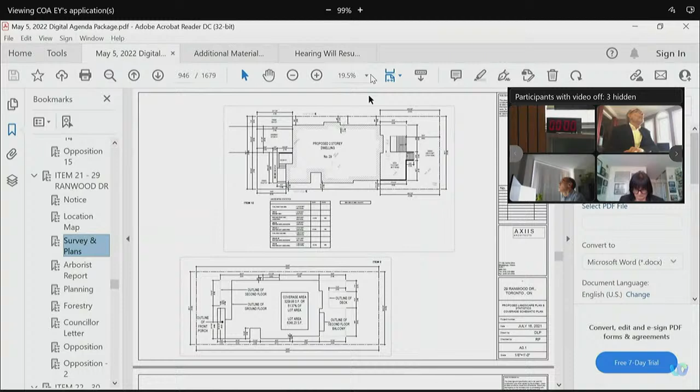Sorry, I can't follow that. So I think I'll ask the question just one more time. What I'm asking is, do you have a variable percentage or number that would tell me that if that storage unit was not included in the calculations, what the numbers would be? I have it right now, not in writing before you for the actual percentage. So you don't have it for your presentation. Okay, thank you.

Yeah, I see. That is something that's usually explained in the staff report. They'll say, well, I know he's at 51%, but if you take off that, it's really all underground, it's really 41%. But that was never... I don't want to repeat what I said earlier. I understand, that wasn't clear to me, to go back and explain that to community planning and for them to say, yeah, he's right, it's not as bad. I sort of look at it by looking at your plans next to the next door house, and hope it's not, and you are a corner lot. That's I think what Mr. Bellissimo and I were trying to get at. I do understand that, and I just was trying to point out that it is there. They asked for it, and this is how we provided it. It was deemed acceptable by them, so I apologize for that.

So let's hear from the neighbor at 31 Ranwood, Ms. Kolanka. Yes, speaking.

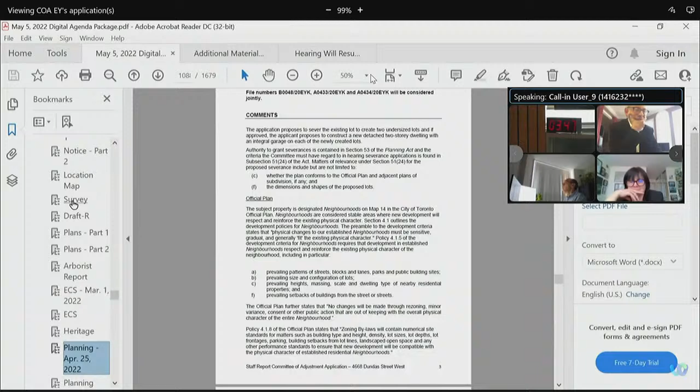So we don't have any unusual variances here, and as a matter of fact, in a consent application, it's typical for there to be 13 variances. That's the usual number, and it starts with lot frontage, lot area, and goes from there. But I don't believe that planning is actually very in touch with what's going on in this application, and I think they've missed it.

Okay, I can see the clock. Can you arrange so I can see the clock, or someone, since I'm blind? Is Mr. Flynn at his 5-minute mark yet? Mr. Chairman, 4 minutes. He has another minute.

If you could tell me what the neighborhood objections are, I would try to address them too. Okay, Mr. Flynn, I told you I just saw something in construction. Where's the elephant in the room?

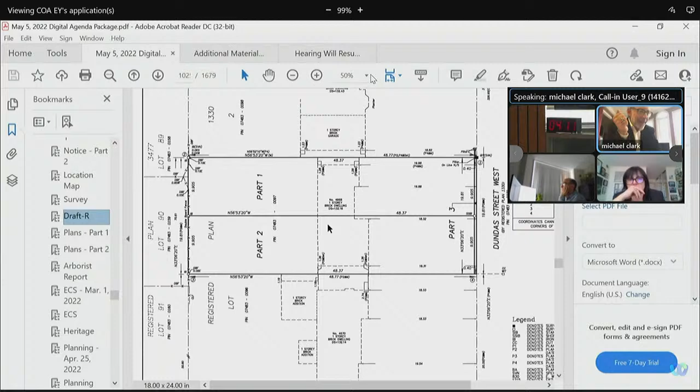You're talking - it says very clearly in the report. They're saying your lot frontage is inappropriate. What are you saying, they're talking about variances? They have a problem, in the last 2 paragraphs of their letter, right at the end. That's where I always scroll to. Planning staff - you're talking planning, okay.

Not approval. Well, hold on a second. The proposed severance and resulting lots would allow for 2 undersized lots that do not respect the physical character, et cetera - they specifically say they are much narrower than the prevailing character of the surrounding area. It goes on. What do you read this? What do they say about that?

April 25th, but it's very clear what they're objecting to. They say the lot frontages are inappropriate, sir. Read it. I know what they're saying. I disagree with them. Okay, but you're glossing over it. You're glossing over it. Prove to us.

You just said something about something up in the Application Information Centre about a lot study. I don't see a lot study. Do you see a lot study? Did you submit something within it? I think it's called supporting material. I don't see that - there's 3 of them, and it's there.

Well, it starts with 4617 Dundas Street West, 4619 Dundas, 4655 Dundas, 4667 Dundas, 4655 Dundas, 4667, 67B, 67A, 4672, 4673, 4674 - that goes on a couple of times - 4676, 4678. What are you reading from, Mr. Flynn? This is listed as supporting material on the AIC.

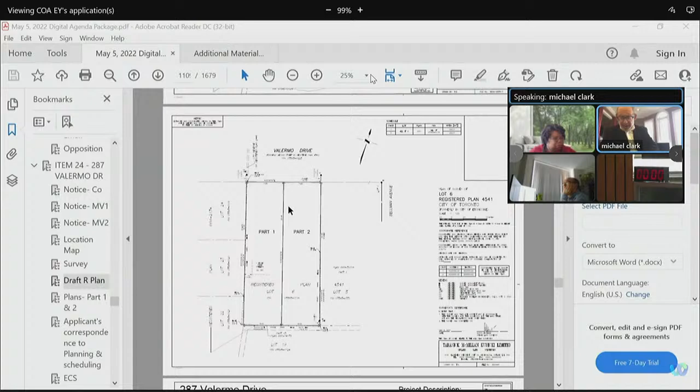Next application is again another consent to sever. Items 24 A, B, and C, 287 Valermo Drive in parts A and B. It's an application to consent to sever the property into substandard lots and to build on each of the sides a pair of semi-detached properties, each having variances to the zoning bylaws.

We have the standard engineering construction services memos and a planning memo back in 2021, not to be scheduled, but other than that I don't believe we have anything. I believe there are 11 variances on each of the sides proposed to be developed as a pair of semis. The applicant is Arlene Beaumont, agent for the applicant, and we have the neighbor from 5 Goa Court present to make submissions.

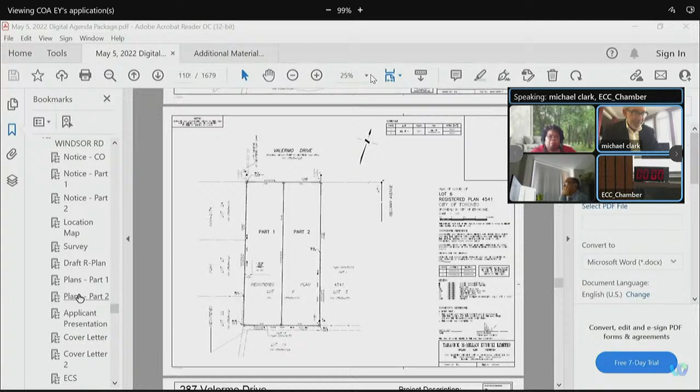Okay, so moving on to item number 25, 24 Windsor Road, application again to sever the property into 2 undersized residential lots and to construct on each side 2 new detached dwellings with attached garages, requiring variances to bylaws as set out in parts B and C. Each requiring, I believe, 8 variances to the bylaw, including the lot area, but not the lot frontage.

Mr. Chair, members, I'd like to bring to your attention that the area resident at 71 St. Andrews and the area resident at 69 St. Andrews are both not present on the call at this time. The area resident at 17 Windsor Road is present at this time. Okay, so we'll hear from him after we've heard from Mr. Sabanu.

Okay, Mr. Sabanu, and we have your presentation materials up on the board, on the screen rather. Go ahead, Alex. Hold on a second, I guess I didn't finish presenting this. I believe community planning has a condition of approval to construct as illustrated in architectural plans regarding front yard setbacks. We have letters of opposition and 11 letters of support. In addition, the engineering and construction services memo, a couple of cover letters, including an applicant's presentation, which a good segue is up on the board.

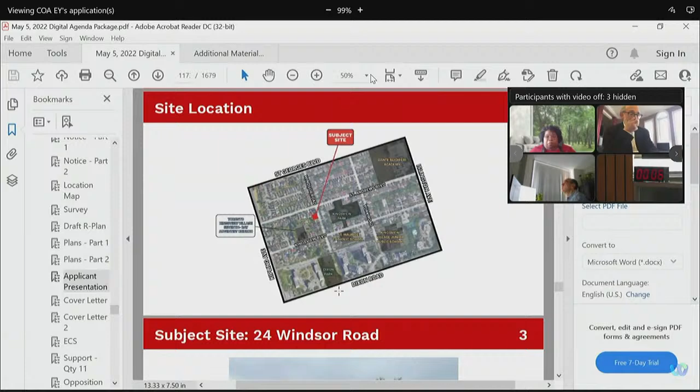The site is located in Kingsview Village, northeast of Kipling-Dixon. If you can go to the next slide, please. What's interesting about this site, Mr. Chair, as you noted, is we do have a variance for lot area, but not one for lot frontage. That's because prior to submitting the application we did a lot study of the surrounding area, and you'll see some of those studies in a moment. Out of all the lot studies, approximately 400 of them, the frontage we have on this site, 27.5 meters, was in the top 1 percentile of frontages in the area. So it is a very, very large site in terms of frontage. If you can go to the next slide, please.

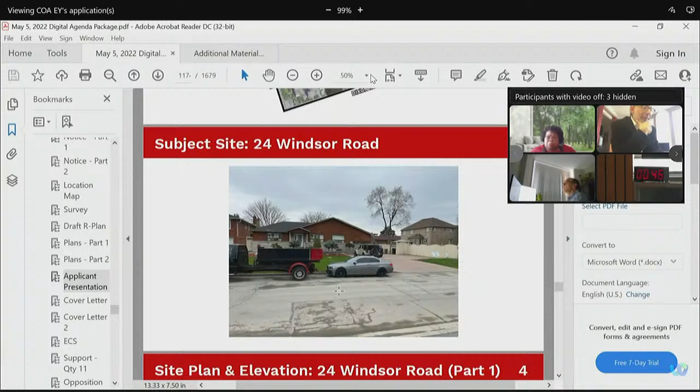So in terms of the proposal in front of you today, we are proposing to sever the lot into 2 and construct a new 2-story detached home on each that would be pretty much identical. One of them is to be used by the father of the existing owner.

Just in terms of the process, prior to submitting the application, we did research and got some lot data information from the City of Toronto, analyzed it to confirm the appropriateness of severing this property. We then approached planning prior to making the application to discuss it with them, and they did agree that this was a lot specifically appropriate to be severed. We then made our application.

We had a number of variances. We met with planning staff, and they noted some relatively minor concerns regarding GFA, coverage and front yard setback. We accommodated those comments and resubmitted the plans, and those are the plans in front of you today. Planning staff now have no objections to this proposal.

We also reached out to our neighbors, went door to door, and you will see on the AIC, we do have 11 letters of support. Next slide, please.

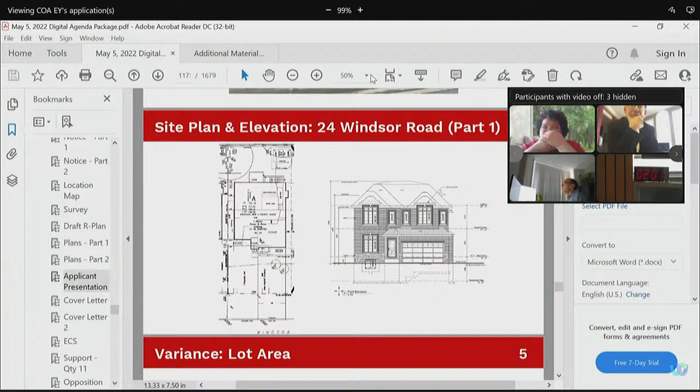So as I mentioned, we do have a variance to lot area. With respect to the severance, each lot will comply with the minimum lot frontage of 13.5 meters, as you can see on the image to the right. So in terms of the frontage, it will be in keeping with the bylaw and also the existing character of the neighborhood.

Regarding the lot size, in our letter we go into a fair amount of detail about the eclectic nature of the lot sizes and configuration, but knowing that I only have 5 minutes, I'll summarize and say, while we are less than the bylaw minimum in terms of lot size, it would be in keeping with lots in the surrounding area.

You can see some of the studies we did in terms of existing lot areas on the image to your left. The size of the lots would be imperceptible from the street. And I think the main thing is that they are large enough to accommodate the proposed buildings, which have been designed specifically taking into consideration the size of these lots. This wasn't a situation where we had a home and we were going to put that home on any lot size. We knew the lot size and we designed the home to respond to the context of those lot sizes in the surrounding area.

Next slide, please. So regarding the front yard setback, the way the bylaw measures setback is it takes the average of your neighbors, but they need to face the same street. So to the north, which is to the left, off page, that home actually faces St. Andrews.

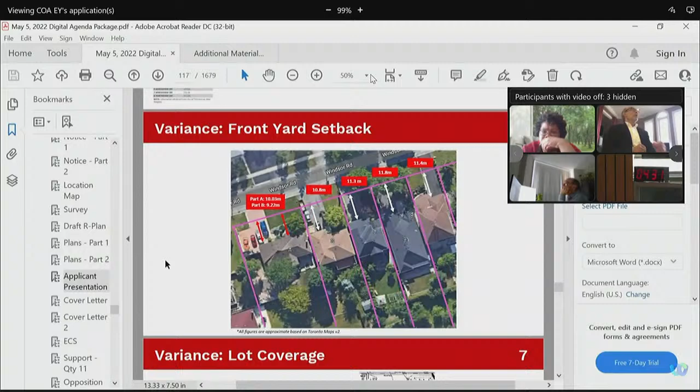Next slide, please. So regarding coverage, a very minor 1% increase over the bylaw maximum of 33%.

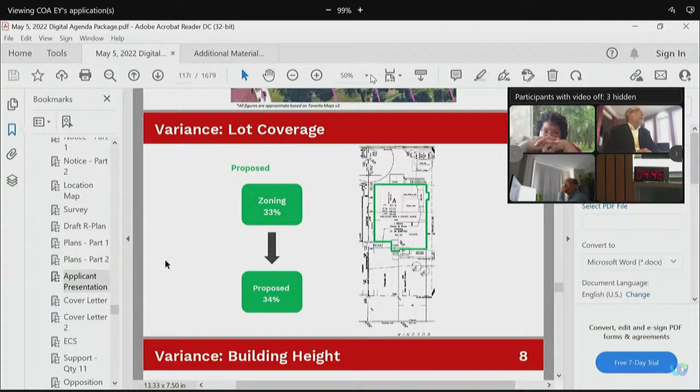We also reduced this from 35% as requested by planning staff throughout the review of the application. Next slide. Regarding height, again very minor, a 26 centimeter increase over the bylaw maximum of 9.5 meters.

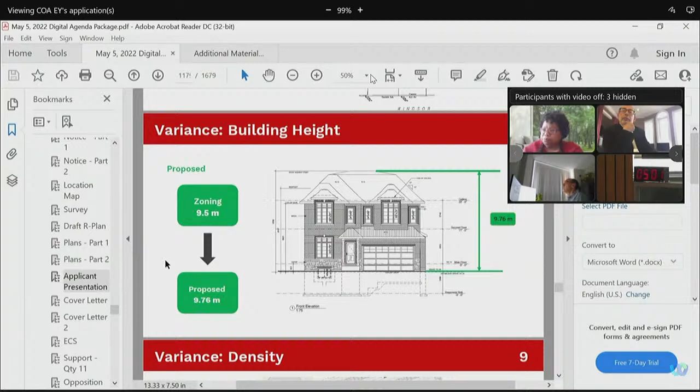And in our opinion it doesn't cause any undue impacts to our neighbors. Next slide, I know I'm going close to the 5 minutes here. In terms of density, very quickly, we had reduced the density from 0.61 to 0.59, again requested by planning staff. This density variance does not cause numerous envelope variances like side and rear yard, building depth, landscaping, and as I said, a very minor 1% increase in lot coverage.

So the next slide, I'll close up by just saying - Chairman, we're at 5.5 minutes. Okay, just in closing, we reviewed the staff reports. We have no issues with the conditions. We did our research before and during the process. We reached out to our neighbors to elicit support and share the plans, and I'm happy to answer any questions you or the neighbors may have. Thank you very much. Thank you, sir.

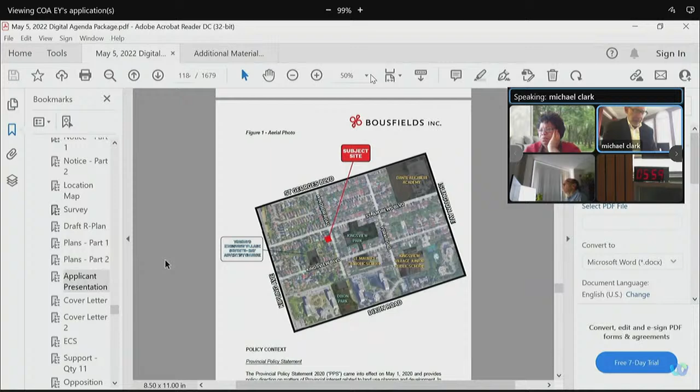Okay, so anyone have any questions for Mr. Semenu? If not, we'll hear from the one neighbor we have present to speak.

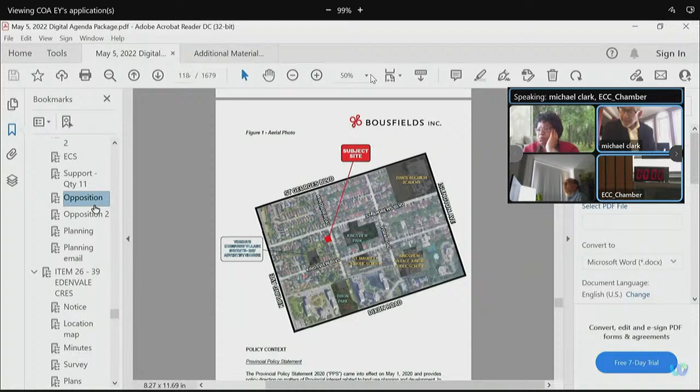17 Windsor, Richard Ross. Hi, can you hear me? Loud and clear. Yeah, so I'm Richard Ross and I live at 17 Windsor Road. I was looking at the plans. I'm sorry, I'm at work right now, looking at my telephone, so I'm kind of cross-eyed looking at all your words on your papers there. But my concern was the variances that were put in place, particularly the setback of the house.

And I think that's been addressed now. I understand obviously the reasons to maximize the amount of home you can get on lands as expensive as they are. That house was not bought too long ago, for about $1 million at the time. So I do understand that severing the property is a good idea in the sense that lot is certainly one of those lots large enough to be severed, in keeping with the styles of the homes and the neighborhood. We all have larger land sizes because it's veterans land from way back when, so we'd like to keep them as large as we can, but we understand the need to get into higher densities, especially with the impact and problems of the housing situation in Toronto.

The other thing I had a concern about, and it seems minor, but there seems to be an awfully large driveway for each one of these residences proposed. Today we have like 6 cars on that lot, and the next door neighbor also has about 5-6 cars on their property. It's getting very packed, and obviously there are more people living in the home of driving age, and perhaps more families. I don't know, but it's causing quite a bit of congestion of cars in the area, and I noticed the driveways being accommodated that way. In fact, that driveway on that house was redone, and I don't know if it was ever allowed to be widened to such an extent that you could put 8 cars in it. I'm afraid the same behavior will take place even if these 2 lots are severed with these larger driveways. I'm concerned because that is not in keeping with our normal driveway sizes on this block, if you care to measure.

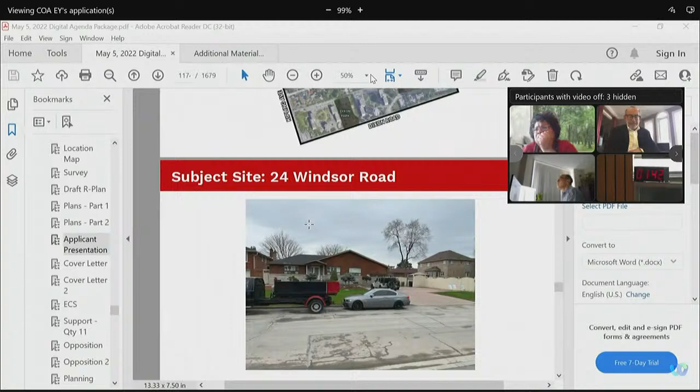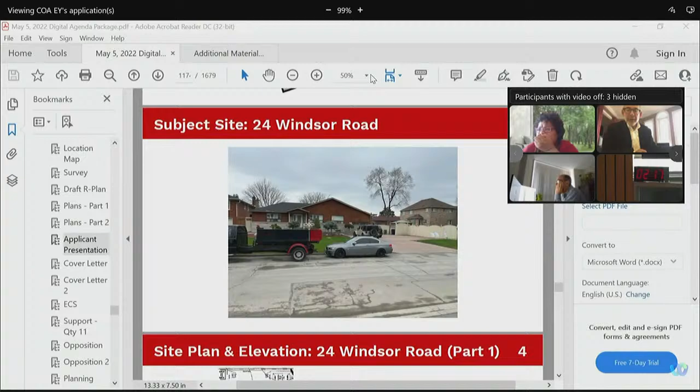Thank you. Okay, any questions, follow-up questions, or is someone ready for a motion? Danny Bellissimo is ready for a motion if there's no further questions.

First, I want to thank the presenter. Such a great presentation. It makes our job so much easier when you see aerial photos showing the houses next to it, and a zoning lot coverage drawing which showed just a 1% increase. So I applaud him for his extra work and making our job easier and easy to comprehend. So I'd like to move for approval of the consent.

Okay, well we'll do it all together, I guess, the variances, yes, all together. Okay, the consent and the two variance applications. And I saw Ms. Ruddick put her hand up. Second that motion, all in favor? Unanimous approval? Wait, we have conditions.

Are you imposing any conditions? There's urban forestry conditions, thanks Barb for reminding me of that. Engineering and construction, and planning conditions too. Yes, the planning condition with respect to construction as illustrated, and also the construction and engineering services standard conditions of approval for consents, and within the whole consent approval the time limits and all of that. So all the standard conditions. Thank you also, Barb. And also transportation conditions, which I think is under the same umbrella. Yes, thank you, I got too excited about the presentation, I forgot about the conditions.

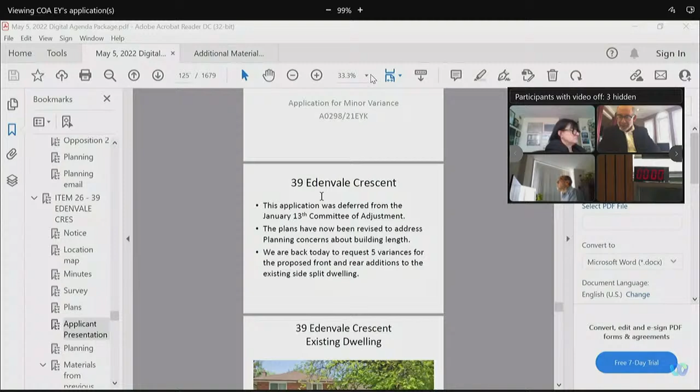There are 5 variances. We have an applicant's presentation. This matter was actually deferred from the January 13, 2022 hearing. We have a planning condition of approval to be constructed as illustrated on the architectural plans regarding the proposed building length and the height of the flat roof, and we have all the materials from the previous hearing back in January. Arlene Beaumont is the only speaker, is the agent. She's actually also the speaker on the matter being held, item 24, A, B, and C, and maybe we'll do that one if we found the other speaker. Good idea, so Mr. Chair, first of all on item number 26, Arlene Beaumont.

Thank you very much, Mr. Chair. So as you mentioned, this item was deferred from the January 13th meeting at the request of planning because we wanted some time to adjust the building length. Planning was not prepared to support anything in excess of 19 meters. We are now down to that 19 meters. So our variance has been reduced a little bit, and all the rest of the variances are exactly the same as what you saw in January. So if you could just go to the next slide, please.

I think I covered that. So, next slide - this is the existing dwelling as it is today.

I wanted to point out there is a concrete deck or balcony above the garage. It doesn't have a railing right now, so I don't think the homeowners are actually using it as a balcony. But the front of the building is being extended - the front of the second floor is being extended to the edge of that concrete deck, so it will match up with the garage. So the front addition is just coming out to the edge of that concrete.

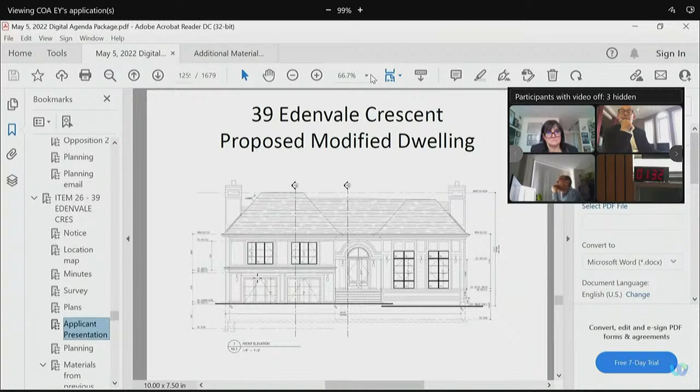And the site plan - the greyed-in areas show the extent of the front and rear additions.

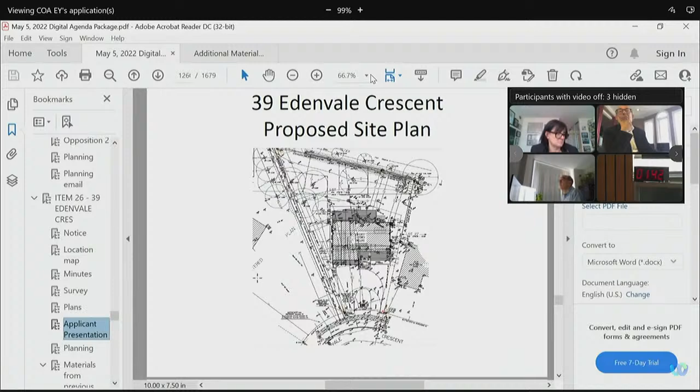So as I mentioned, the existing front yard setback to the garage is 15.29 meters, and the proposed front yard setback is 15.29 meters, because we're bringing that second floor out to match up with the front of the garage. It will still be located behind the adjacent dwelling at 37.

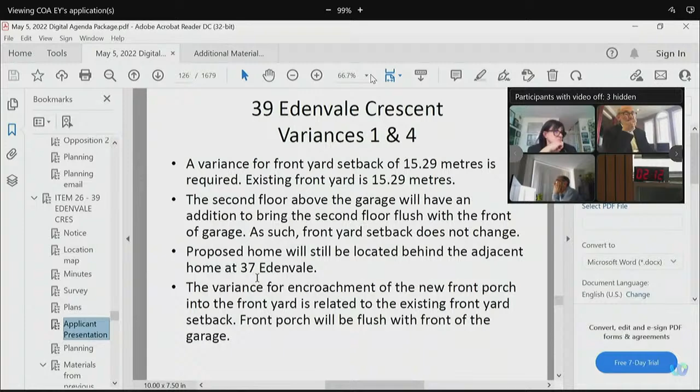And there's a variance for encroachment of the new front porch - again, that's related to the existing front yard setback. The front porch will be flush with the front of the garage. Next slide, please.

So as I mentioned, the length of the building has been reduced to 19 meters. There's also a variance required for the length of one of the parking spaces interior to the garage, because the homeowners are adding an elevator. The elevator is going to take up some space, thereby reducing the length of that one parking space. I've illustrated that on the next slide.

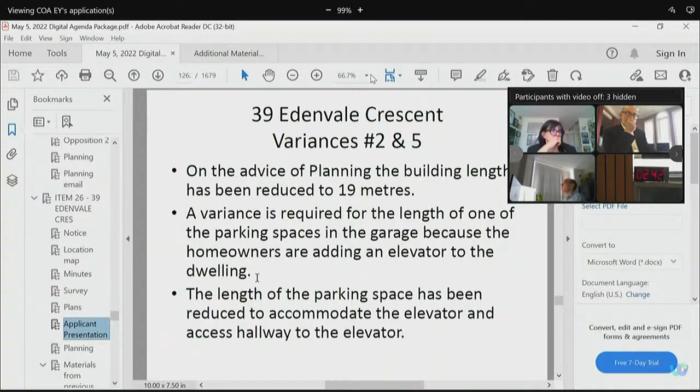We also require, the final variance is for dwelling height. That is required only under the old Etobicoke zoning code, because under that code, if 33% of the roof has a slope of less than 2 to 12, then it's considered flat. Under the new bylaw, we do comply with the height because there's a different definition of flat roof - so we are considered a sloped roof under the new bylaw, but a flat roof under the old bylaw.

So we need a height variance under the old bylaw. We do meet all the requirements under the new bylaw. And that's basically it.

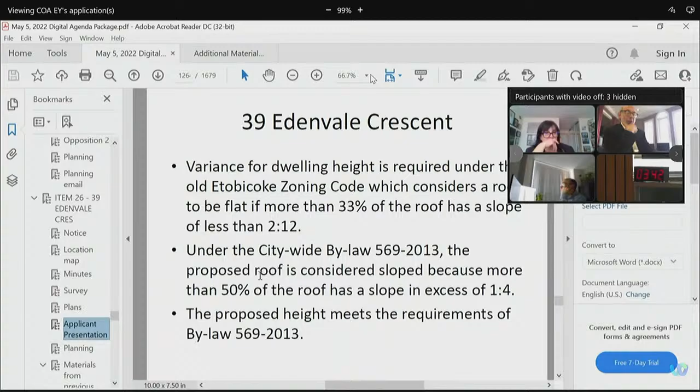I was going to say, and you're okay with the planning condition tying your length and the flat roof height, which is explained in the architectural plans? Yes. Okay, perfect. Any questions for the agent, or someone ready for a motion?

And you're okay with the urban forestry condition 2? Yes. Great. Any further questions or a motion?

There's no questions, I'm ready for a motion. And the variances requested are minor in nature, so I'll move for approval, subject to forestry condition number 2. Thank you, second for that. And sorry, tying it to that planning condition as well, tying it to the plans of March 5th, '22 regarding length and flat roof height.

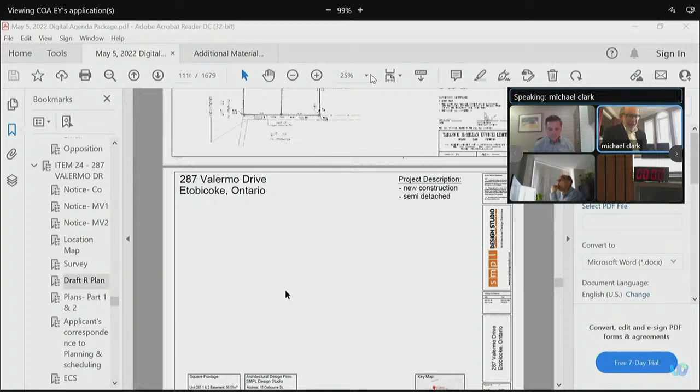Okay, I had a concern about, Ms. Beaumont, when you make your presentation, do we not have anything from planning? Because back on October 6, 2021, we have a one sentence memo saying staff recommend this application not be scheduled in order for the applicant to consult community planning. Well, that was back just before Halloween, so it's been a long time since then. So if you can touch base and let us know if there's been further contact with planning. And otherwise, why don't you give us a short presentation on this consent to sever that I already introduced. I'm not going to do it again, but you can consent to sever the property and build two semis, a pair of semis.

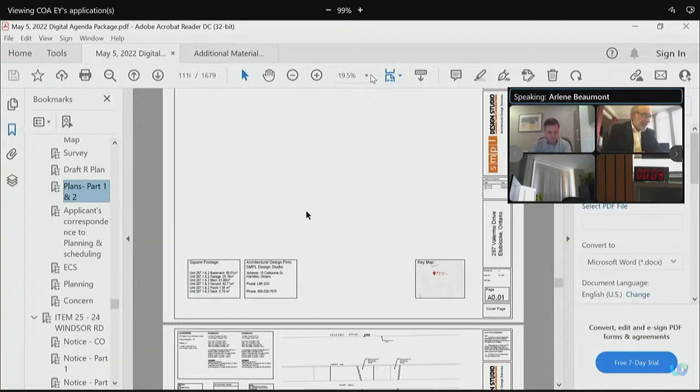Thank you, Mr. Chair. Yes, we have been in contact with planning, and we did actually take their comments into consideration, and we did revise the plans. So we have reduced quite substantially the lot coverage variance as well as the height variance. We have also reduced the gross floor area variance, not as substantially as lot coverage, but we did have a reduction. So I believe that's why planning has not commented. So the plans you were looking at were resubmitted in early March. As you mentioned, we're looking for a severance to build two semi-detached, and we need variances for lot area, frontage, coverage, GFA, side yards, height, setback to a deck, driveway width, and parking space in a front yard.

All the variances, I believe, are very much in line with others that have been approved in the neighborhood. This neighborhood's undergoing quite a lot of rejuvenation right now, a lot of older homes being torn down, severances, new builds, that kind of thing. And from our review of previous applications that have been approved in the neighborhood, our variances are in line, maybe a little bit on the high side, but still in line with what else has been approved in the neighborhood.

Okay, so I'll take it then the variances that appear before us are the ones as revised, right? That is correct, yes. Okay, perfect. Does anyone have any questions for Ms. Beaumont? Or if not, we'll hear from the neighbor in the little court right behind. You can see on where she is on the location map. Okay, so welcome, Agnes Mikalski.

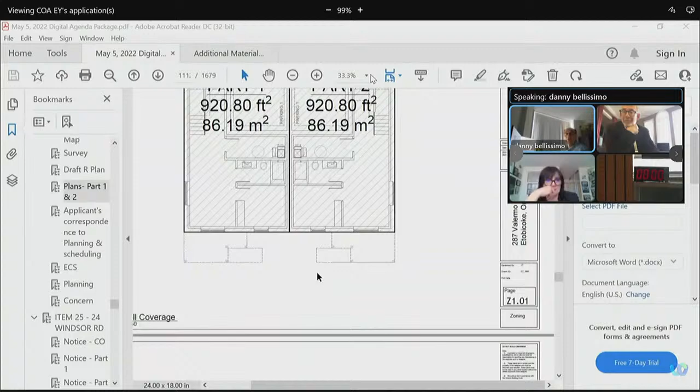Okay, any other questions, or is someone ready for Mr. Bellissimo? Danny Bellissimo has a question. Could the staff put the drawing, elevation A2.02, on the screen? I just have a question of the applicant. It's the elevation A2.02, further down. Okay, that's it, I think.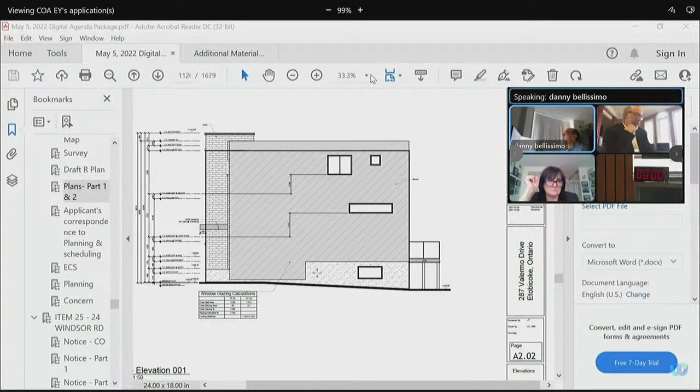So my question is, the heights are based on the frontage of the house, and they include the parapets, correct? Yes, I believe so. And did you know why the parapets have to be so high? Is it a slope roofing condition? They're excessive in my mind, but I'm just wondering why technically those parapets are so high. I'm sorry, I can't answer that question that way. I don't know. Okay, and the ground level at the back slopes down.

It doesn't say how much. Do you know how far that grade goes? See the bottom there? It slopes towards the back, right? Yes, it does slope towards the back. We should have a calculation of grade somewhere. That's fine, I just wanted to clarify this because there's no height numbers on the back, so I'm assuming all your heights are at the front.

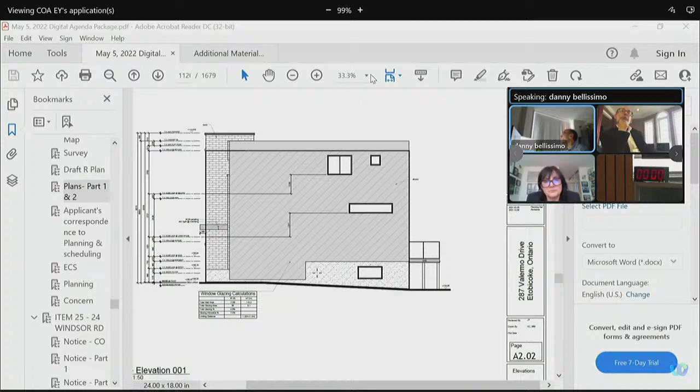And I just wanted to point out, can we go to the drawing before that, A201? That's the one before that. And so those parapets, they're just in the center part, the higher parapet. You actually have two parapets, a center parapet and an end parapet at both of the semis, correct? Is that just an architectural feature? Because that impacts visually on the height, right? Yes, it does. I think it's just an architectural feature. Okay, thank you.

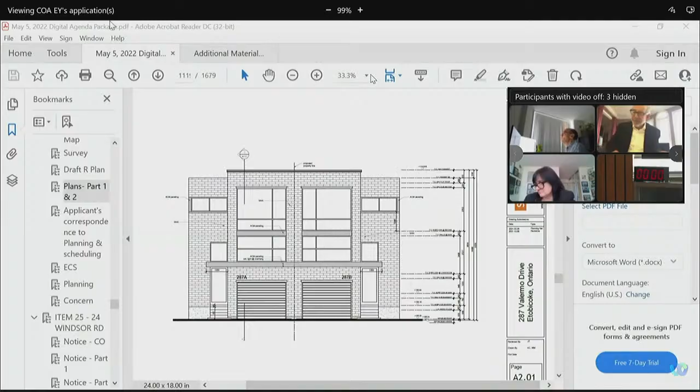Okay, any other questions, or is someone ready to weigh in? Mr. Palmer? Yeah, I'm ready for a motion. I'm concerned about the character, built impact, and massing of this proposed semi-detached two dwellings. So I'm going to move for refusal of the request to sever and of all the variances.

Okay, do I have a seconder for that motion? If none, do I have a new motion? I will second Mr. Palmer's motion based on the height. I'm concerned about the height. Okay, I'll second that motion. I'll second that motion for refusal, yes.

Okay, all in favor of the motion to refuse the application? Hands are up. Okay, it carries 4-1. I will dissent. I believe it's a supportable application. We didn't hear from community planning. So motion carries. The application is refused.

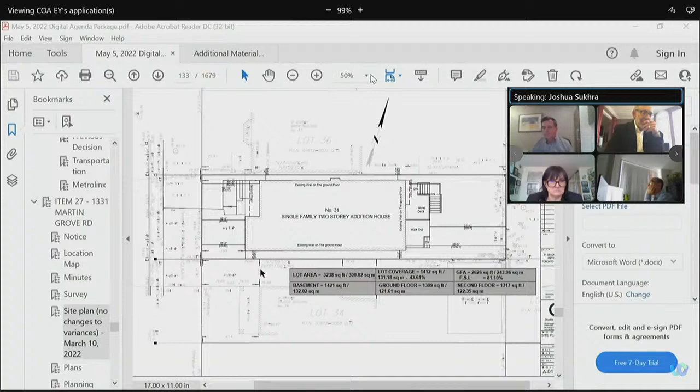Okay, so hi everyone. What happened is that I was going to come in on the 10th of March, and Mr. Timur, when he looked at why we were coming in, said there was no reason for us to come to Committee of Adjustment because we were approved a few years ago already for all of this, and we have a $65,000 security deposit with the city for a few years now.

Unfortunately, we are just a small church and we couldn't afford to finish the whole parking lot or the landscaping. So I asked Sabrina for some time, and Sabrina told me I have all the time. The only thing is, the longer I take, the longer I'll take to get back my security deposit.

And when we were ready to do the project, the pandemic was there and we couldn't do very much. Then finally, recently we asked again to get the project done, but then there was somebody else by the name of Joshua who said he would refuse that approval. He said we have to come back to Committee of Adjustment to get it done, and that is why we came back here.

So Mr. Timur, I think he's with community planning, told me to go in for a deferral because he wanted to make sure that everything is okay, since we didn't need to go back for a new approval. The old one was still good for us because Sabrina told me it wouldn't expire or anything. Then he asked this new person working on our project to let us go with it because it was already approved, but he didn't want to. I begged him, but he didn't want to. He said, 'No, you have to go back.'

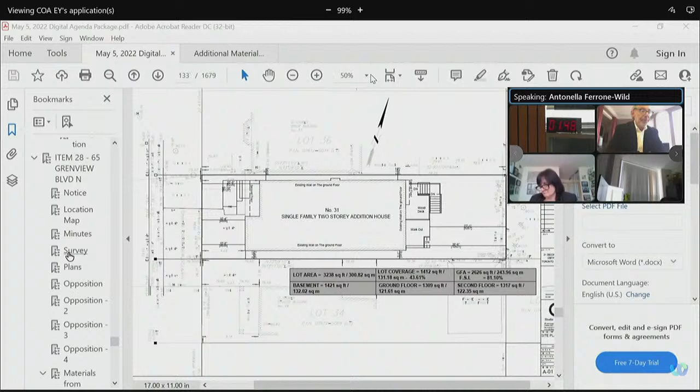I have many examples of similar proposals granted, but the closest is actually 62 Grenview Boulevard across the street. They were granted 150 square meters plus 47.5%. One Kingsway Crescent was granted 150 plus 52%. 52 Strath was granted 150 plus 62%. Not all of them had an FSI. 52 Strath's FSI is 0.86, and at 29 Kings Garden, their FSI was 0.88.

Because we removed the storage below the porch, we removed the variances for length and depth. There was concern about the number of variances, so quite a few were removed. The other variances are for side yard setback of 0.61, and the setback to the rear porch of 0.61.

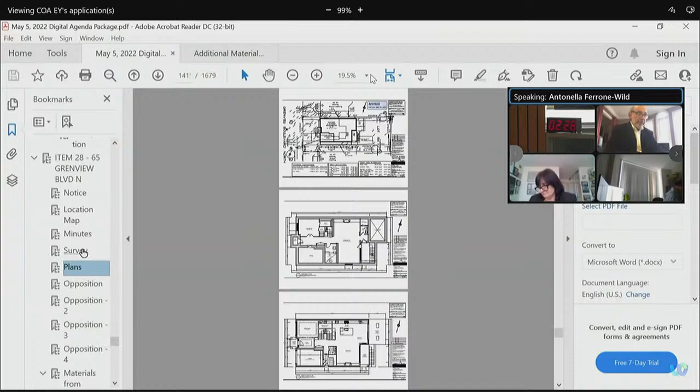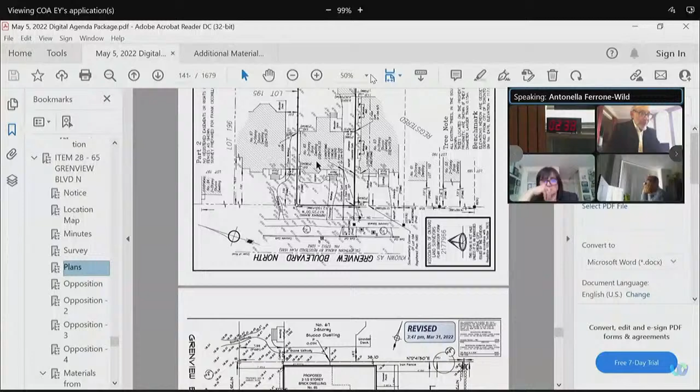You see from the map, the proposed house matches the existing setback to the north. When you look at my site plan and see the dashed line of the home to be demolished, compared to the home that is being proposed, the setback is identical. So that means the impact to the street remains unchanged. But having said that, the setback of 0.61 and even less is very common in the neighborhood.

I found many examples, the closest of which is 23 Grenview at 0.41, 62 Grenview at 0.89, 47 Grenview at 0.6, and I have almost a dozen other examples. Same thing for eaves examples, so I'll skip those for now.

Then there's the height to the flat roof, and the fact that it's a 3-story structure when 2 stories are permitted. So although more than 50% of the roof is flat, and the roof is sloped to the street at both the front and the rear, and presents as a sloped roof, the variance is numerical in nature and appears greater than necessary due to the math.

It is consistent with the prevailing character of the 3rd-story dormers in the area. If you stand on the front lawn of this property, you will see at least 8 examples of 3-story homes, and that doesn't include the existing house on the subject property to be demolished.

I have 21 examples of past approvals in the neighborhood. I won't go through them all, but the closest is 62 Grenview, which was granted 9.87. 66 Grenview was granted 9.8. I have some as high as 10.25, and one here at 11.2.

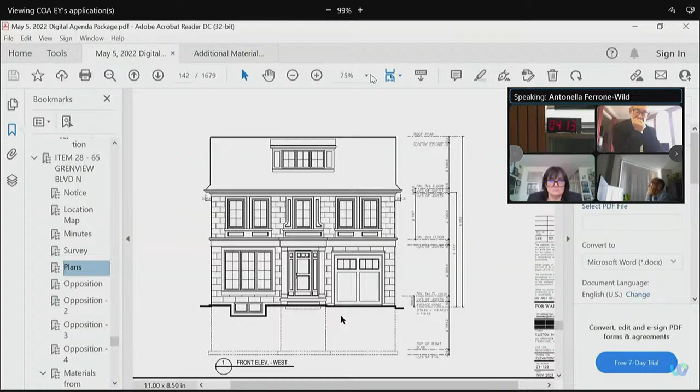The driveway width variance, due to urban forestry's concern for the tree, was also removed. We believe that the variances requested are necessary to construct a home that is in keeping with the trends in the area, and most specifically on the street. They match the massing and style of the street, in the 2.5-story dormer style that you see next door and across the street.

I look forward to hearing the speaker's presentation, and I hope to alleviate their concerns. We did leave a letter in everyone's mailbox and knocked on their doors. We didn't receive any immediate feedback, but hopefully we can do that now.

Okay, thank you, Ms. Wild. So yeah, in the minutes, this matter was deferred to council. I think there were 10 variances; there are now 9. You've gone through the changes that have been made. It was to make new notice to be okay. So does anyone have any questions before we move on to the 2 neighbors?

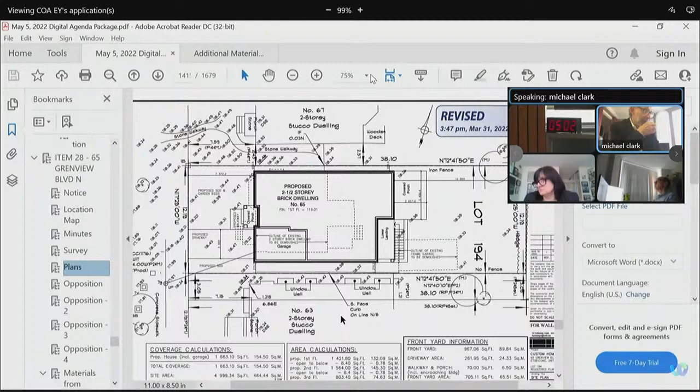We have both adjacent neighbors present, and we have their letters. Perhaps we put their letter up while they speak. So the first neighbor we'll hear from is Cliff Hacking at 67 Grenview.

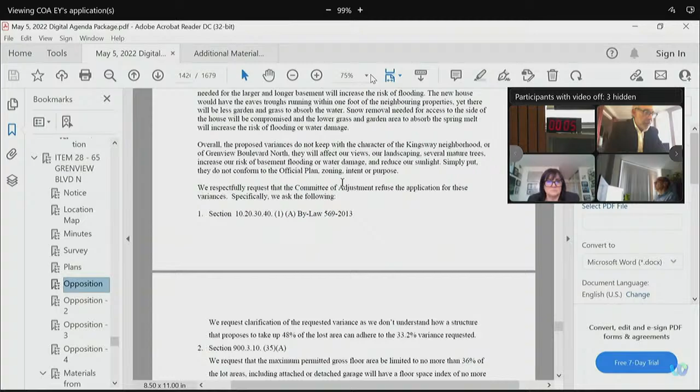Thank you, Mr. Chairman. A couple of things. First of all, the proposal that we received a letter is inaccurate - we received no letter from the builder or from this lady, Ms. Wild. So I just need to clarify that. I'd go on to say that the builder here is not looking to live in the area as many others have done, but rather with a motivation of pure profitability.

And profitability is great, as long as it's not going to negatively impact others. We're not concerned in the least with the increase in height, the 3rd story - we understand that, and we're supportive of it. But we're very concerned about the setback on the side.

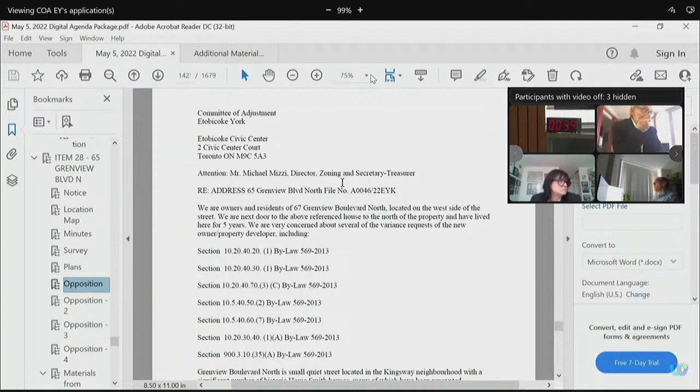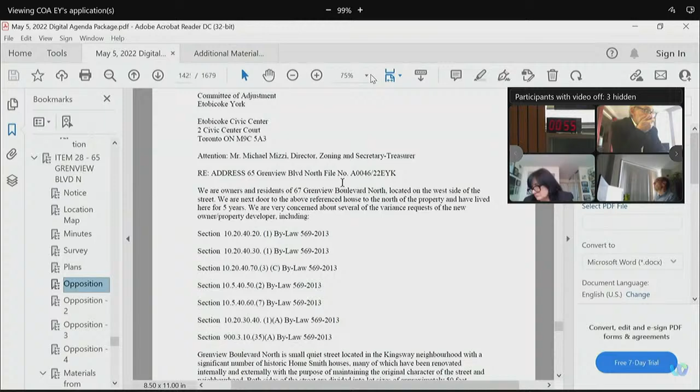I'd go on to say that this house has been vacant for more than 2 years now - we're into our 3rd year of this situation. I had to personally call enforcement to get them to cut the grass last summer, which was almost 2 feet high, and they enforced it. They did not shovel their snow throughout the entire winter, creating a slip hazard for anybody in the neighborhood walking down to the subway, including my family.

There's been a blatant disregard for any of our concerns, and that's the principal one. We're also concerned about the back setback and want to make sure it doesn't go back farther than the current buildings do, so it doesn't block light or planting or other vegetation we have out there.

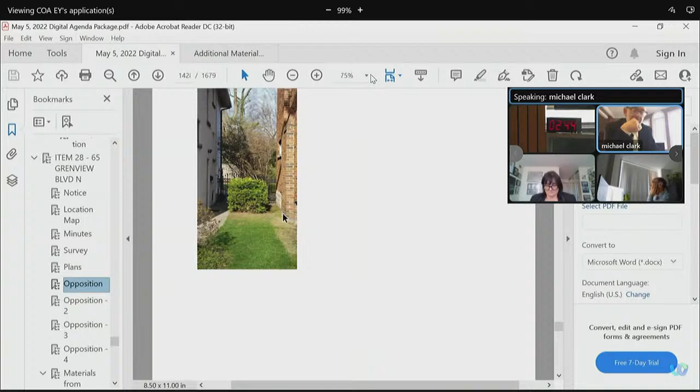I just wanted to back up what Mr. Hacking said, which is that there was no letter left by the owner or his agent throughout this whole process. The only thing I received was a hand-scribbled note on graph paper on the evening of April 28th, which was actually the deadline for us to submit this latest letter of objection. So if there was a door-to-door visit, it would have happened too late for us to have our concerns addressed.

Personally, or issues explained. So this is why we're here, because we never really had an opportunity to have a discussion with anybody related to this property at all. And I'm quite sensitive to the fact that we're at this stage, because as noted, my husband and I just rebuilt our home right next to number 65. So we're very aware of both sides - the need to preserve the integrity and beauty of the Kingsway and not overbuild, while at the same time needing to build certain things that will accommodate, in our particular case, our aging bodies.

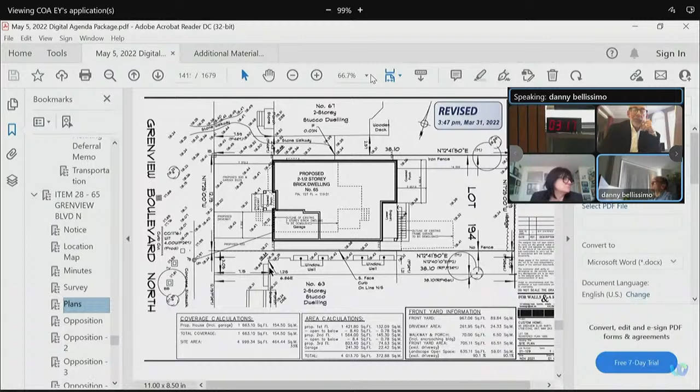Okay, that's fine. I was just asking because I have some issues with the side setback there. I think it's too close given the height of this building, and I think the covered porch is insensitive to put it too close to a neighbor, and that neighbor at 67 may come back to us one day and want a bigger building there with a setback that respects it, irrespective of the fact that they now have a walkway there. I definitely can say my client would be happy to move the covered porch over 2 feet. If I'm texting now, he hasn't answered, but that one I'm quite certain he'd be happy with.

Okay, thank you. I'll let the other members comment as well. Does anyone else have any questions or comments for Ms. Wild, or is someone ready to weigh in? Got three. I'm gonna have to log back in after this application on my phone. So is someone ready for a motion?

Let me try. Danny Bellissimo, since no one else is weighing in on opinion, I would like, if we're allowed, to approve variances 1, 2, 3, 6, and 7, and not approve variance 4 and 5. Those are the two side setbacks at one end of the property.

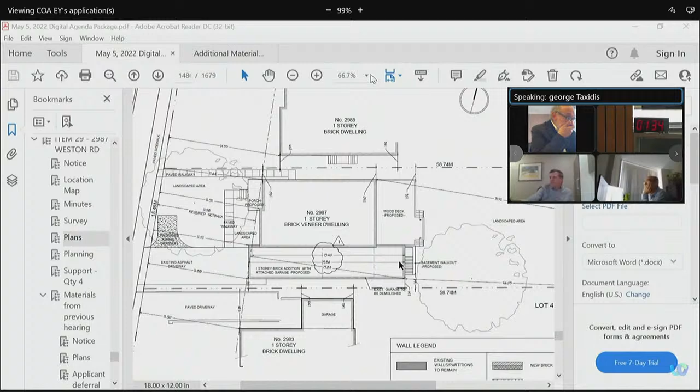For the positioning of the addition, we moved it slightly forward, which affects the front yard setback, going beyond the allowed front yard setback by 0.36 meters. We did stagger it slightly from north to south to minimize the effect of the projection and keep it somewhat in line with the front property line.

As for the side yard setback, the proposed is slightly beyond what is there already, which is the existing garage, to be demolished and rebuilt slightly wider to accommodate a slightly above standard size vehicle and some storage, and again to accommodate some of the living space we are proposing.

These would affect the depth and length of the house, which are beyond what is allowed - the depth being 0.82 beyond the proposed. I believe the allowed length is 17, and we're at 19 point something, sorry I don't have it in front of me. With regards to variance number 5, I believe that refers to the projection beyond the front of the house.

On the south side where the garage is, the garage projects slightly beyond what's allowed, which is the existing house, by 0.42.

For the proposed driveway width, I think that should address the hazardous conditions when leaving and accessing the site because of this busy stretch of roadway. This has also been addressed previously along with residents along that road corridor, and letters of support from Transportation Services Division are included in the supporting documentation in the file.

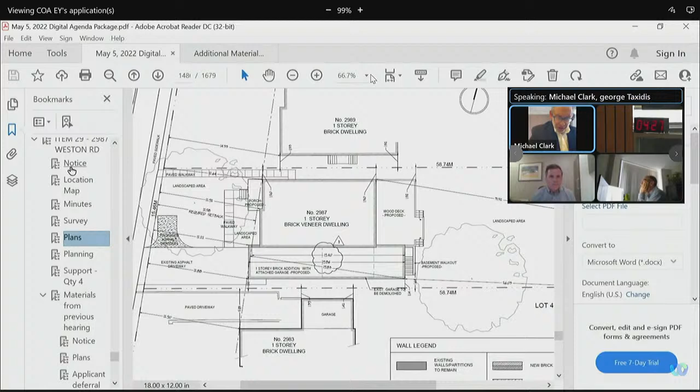Can you hear me? Oh yes, I can hear you. I'm not sure which one you're looking at. No, I'm saying the revised application - there was a revised application. Yes, the application was revised. What was revised on that report was they had omitted - the original zoning examiner had omitted the front yard setback.

So that was, I believe - let me just look and see which item number that was. The front yard setback at 12.58. That was added later after our deferral.

Okay, I just have a note in my notes - correct me if wrong - it just says revised notice, variance 1, revised existing driveway width of 14.6. What am I looking for? Those, Mr. Chair, are previous decisions in the area that the applicant submitted, and he's highlighted certain things on all of them. I see, okay, similar to our revision page.

Apologies - so planning is looking for refusal. We have 4 letters of support, and urban forestry condition 2. Members, any questions for Mr. Taxidis, or is someone ready to weigh in with a motion?

I'm ready for a motion. I disagree entirely with planning department. I think the variances requested are very minor in nature, looking at the site plan. I'll move for approval, subject to transportation conditions and forestry condition number 2.

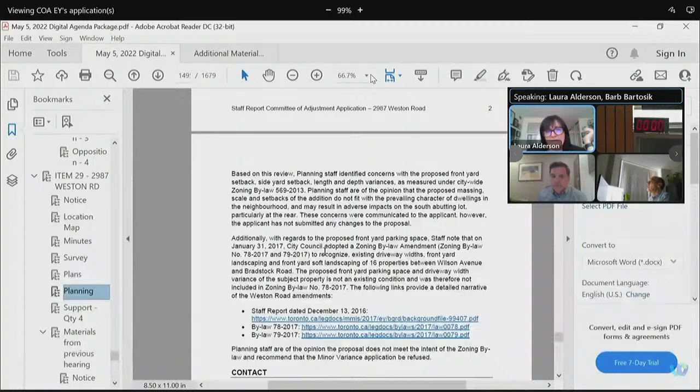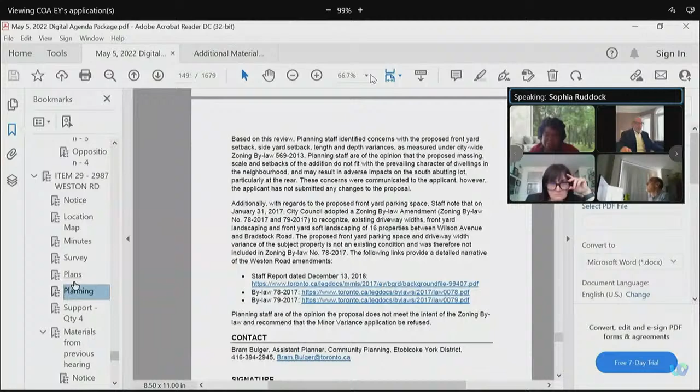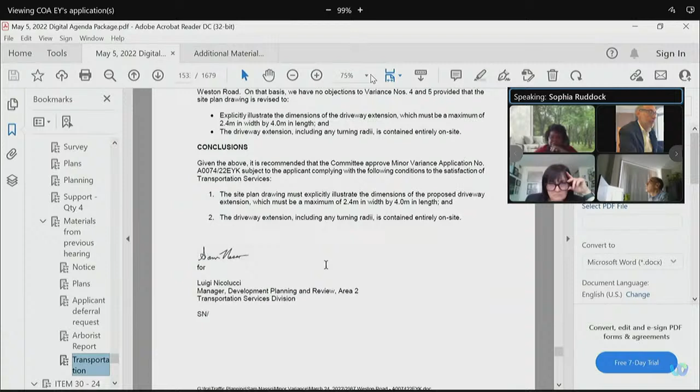Okay, I think maybe I misread it, then it's better to go with the conditions from transportation services. There are 2 conditions from transportation services in their memo pertaining to the driveway, on the last page of their memo. If you could pull that out and put that in. No, they make sense, I didn't read it correctly, sorry.

So we're saying now that we don't have to worry about transportation conditions conflicting with Mr. Palmer's motion? Correct. Okay, can we have that motion again then, seconded, or were we there yet?

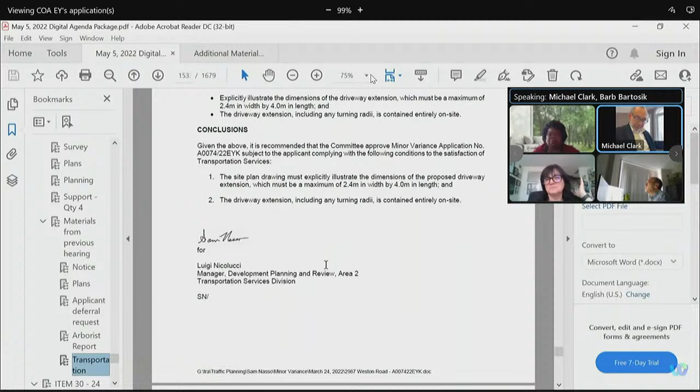Or does someone have a record of where we were 5 minutes ago? There's a motion to approve by Neil Palmer with Forestry Condition 2, Transportation Services Condition. We need a seconder. I'll second that, thank you.

All in favor? I can't see, so please someone tell me. Everyone is in favor. Okay, perfect, unanimous. Thank you, Mr. Taxidis.

Moving on to our last application of the afternoon, 24 Fairfield Avenue. This matter was deferred from the October 14, 2021 hearing. It's an application again to sever a lot into 2 undersized lots and to construct on each side as set out in parts 1 and 2, applications B and C, whichever you wish, to build on each side a new detached dwelling with an attached garage, with variances to the bylaw.

And it looks like we got 7 in each case. Let's see if they're a mirror image of one another. We have planning requesting a condition of approval back from October 6th, tying it to construct as illustrated in the architectural plans regarding length and the front elevation design.

We have 7 variances, including substantial lot frontage of 7.62 whereas 12 is required, and lot area. We have letters of objection, 2 letters from the Long Branch Neighborhood Association. Those are the only ones we have.

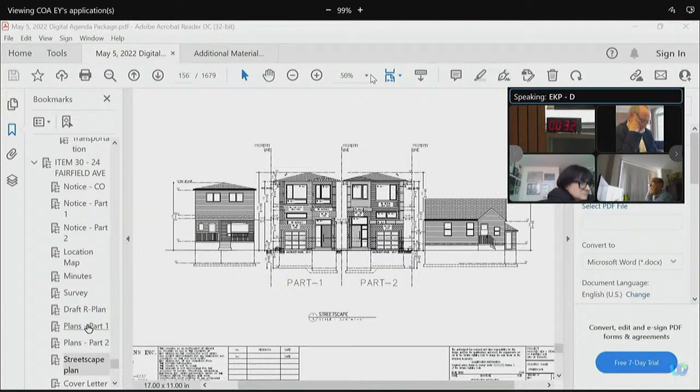We've also sent in a revised site plan, showing that the existing sidewalks and all that is going to be converted into soft landscaping. That was submitted the other day. And we were always ongoing with the planning department.

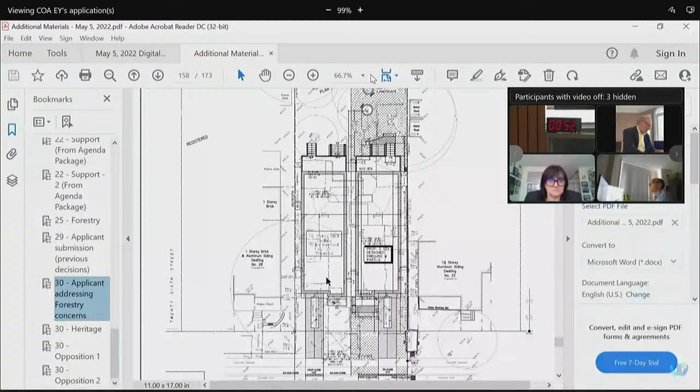First we had a flat roof, higher houses, so we changed the design to a pitched roof. We now only have 8.5 meters to the top of the roof, where 9.5 meters is allowed, so we're 1 meter below the height - it's not a tall house. The only thing we have is the height of the main walls, which we're slightly over - where you're allowed 7, we have 7.5. I feel that the application we're putting before you is very minor in nature, and it meets the 4 tests. I'd like to hear from whatever you have to say.

Thank you very much, Mr. Perez. Any questions for Mr. Perez, panel members? Yeah, what did I see something around, was I dreaming - heritage? Was there something to do with heritage in this application, in the additional materials? I don't have my materials open. Okay, so what kind of heritage condition?

If it's the archaeology ones - oh okay, because I know we're demolishing the house. Okay, you're okay with the condition, Mr. Perez, your client? Yeah, well, we're okay with it, but originally that wasn't there. They just came on this submission, the first I know. But we're okay with it, we'll take care of it. Yeah, we just got it in our package yesterday or last week. Oh, you know, so we didn't see it either. We're okay with it.

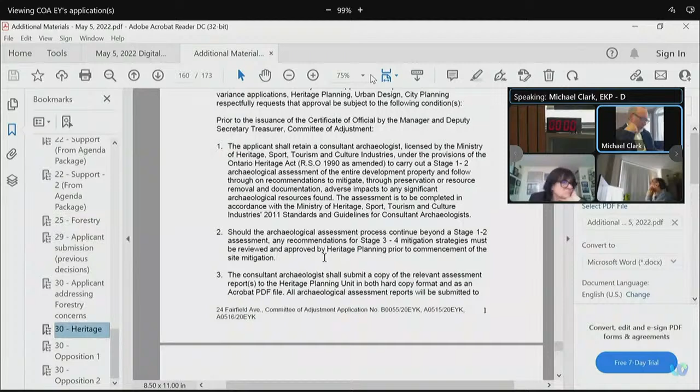Okay, so now we have 2 speakers: Andy Choles from the Long Branch and Stephen Vela also from the Long Branch. Good afternoon, my name's Andy Choles. I'm referring to a letter of objection from Christine Mercado, and the other letter from LBNA. That's the one there.

My name is Andy Choles, I live at 12 Jasmine Avenue, Long Branch. I'm a board member of the Long Branch Neighborhood Association. I'm here to express our concerns about the severance of the lot at 24 Fairfield and the proposed building of 2 homes, one on each of the undersized lots. These planned houses are overbuilds for these tiny lots. It has been a while since I've had to oppose a lot severance with a plan to build 2 soldier houses. I had hoped these things were in the past, but I guess not. With an FSI of 0.64, each of these homes is almost twice the allotted 0.35 FSI for the area.

As is the problem with soldier houses, such a narrow lot, the only direction to build is up. It's a little disappointing to read the planning report, which seems to imply that this type of house is fairly common in the area. I'd like to put forth that this proposal does not comply with the official plan section 4.1.5 and is not common in the area.

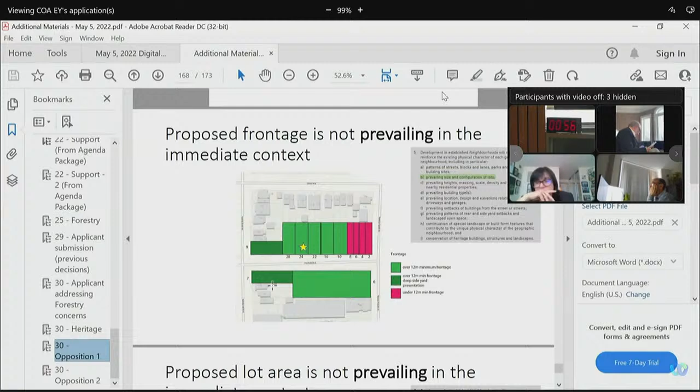Referring to the LBNA letter of objection on page 2, this map shows that the proposed lot frontage for 24 Fairfield is not prevalent on the street. The green areas represent the lots that have frontage of 12 meters or more. That is all the lots on this block of Fairfield, save some at the end of the street, 4 at the end of the street. I imagine these were 12-meter lots that were severed at an earlier date.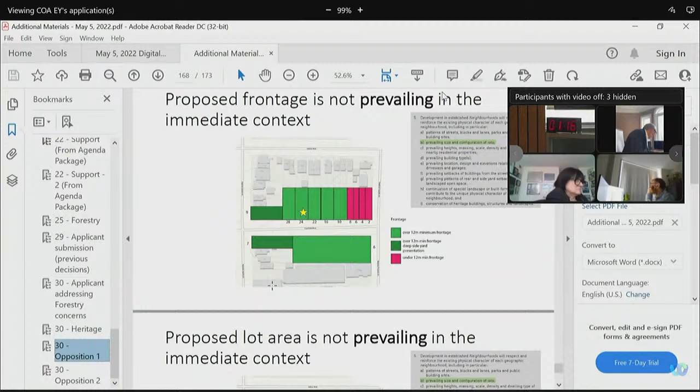Likewise, on page 3, shows an area or size of the lot is not prevalent on this block. Those same 4 pink lots on the end are the only lots less than the bylaw minimum of 370 meters squared. The majority of the lots are generous size with smaller houses and ample landscaping adding to the beauty of the neighborhood. The proposed home will be crowded onto the lot with limited space for soft scaping.

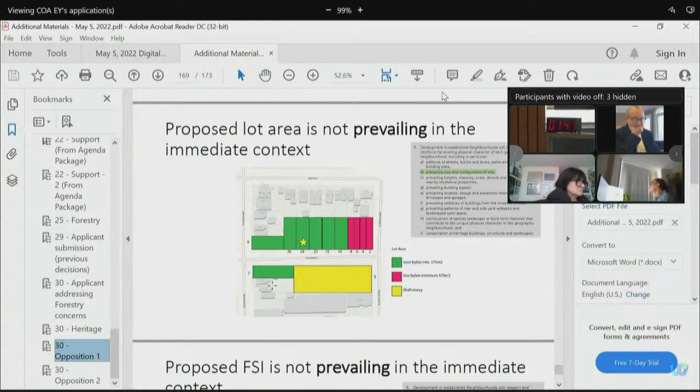The map on page 4 reveals the FSI is not common, even of the two smaller lots, the corner of 24th and Fairfield measure a compliant 0.35 FSI or less. Should the build on 24 be approved, it will double the overbuilds on this block.

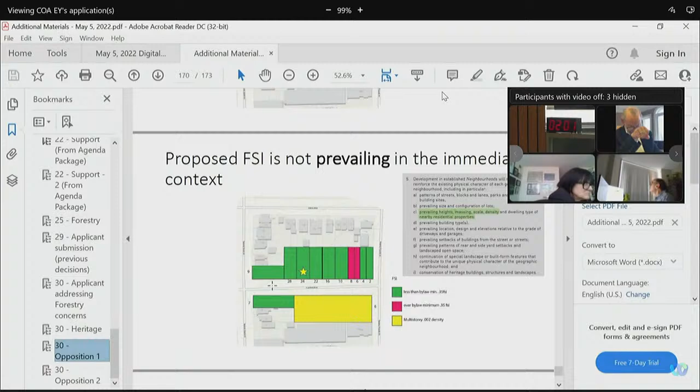Looking on page 5, shows the FSI of the homes one block west on Fairfield between 26th and Phlox. There seems to be more homes above the 0.3 FSI, 0.35 FSI, but they still remain in the minority.

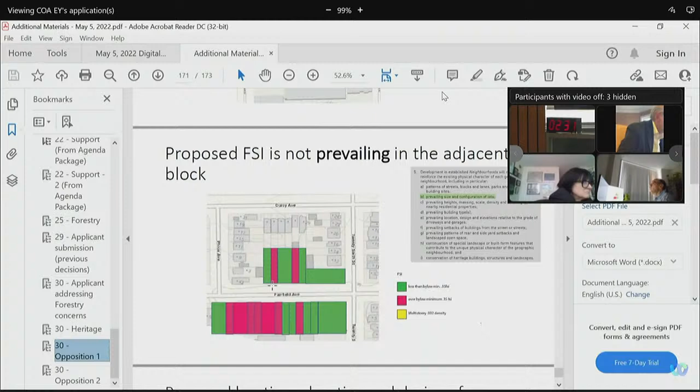The inclusion of an integrated garage in many soldier homes often creates a home that is unnecessarily tall and looms over the road and nearby neighbors. The map on page 6 shows the inclusion of an integrated garage is not common in the immediate context on the block, and page 7 shows they are not prevalent on the next block to the west. There are more homes with parking pads in the adjacent block than integrated garages.

The LBNA always prefers that the parking solution is maintained when a home is renovated or rebuilt entirely. Eliminating the integrated garage will go quite a ways to reducing the massing of the building and make it less imposing. The official plan states that no changes will be made through rezoning, minor variance, consent, or other public action that will be out of keeping with the physical character of the neighborhood.

Clearly, these homes are not keeping with the physical character of the neighborhood. I believe the 4 tests refer to the immediate context of the same block and the block adjoining. These houses will be crowded onto the property. Despite some redesign to make the houses shorter, there still remains 7 variances outstanding: too tall, too close together, eaves too close to the lot line, etc.

I've seen all too often when these soldier houses are going under construction, a huge hole is dug pretty much the width of both lots. It is dug big enough for the foundations of both homes. With a hole this size, it is unavoidable to dig up tree roots and threaten the green space.

Previous construction done at a neighbor at 22 Fairfield has impacted a tree on at 24. I'll leave the tree arguments to my colleague. I even spotted a report in the file from Archaeology, Heritage, and Planning. Now, that was a first for me, but it might be that huge honking hole that has to be dug with a shovel.

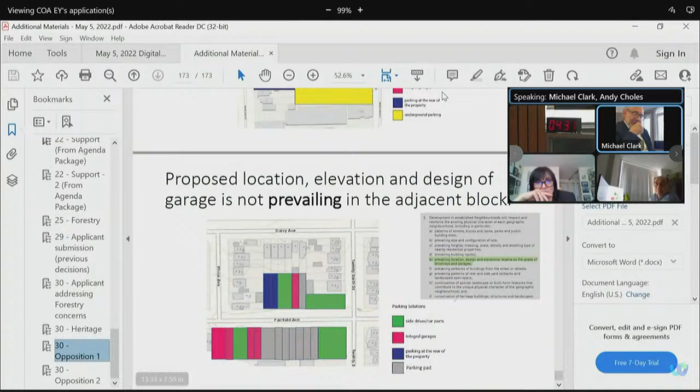Go ahead, Danny. Okay, sorry. I just, because the presenter had to make such a quick presentation, I wanted to ask you to elaborate on what you were saying about the garage and the parking pads.

I'm assuming you're saying there's no solution necessarily because you don't like the overall design, but were you suggesting a proposal for dealing with parking, either a pad or a garage? I wasn't sure what you were saying there.

Generally speaking, integrated garages are not looked upon favorably by the LBNA. We prefer to preserve the present parking solution, which is, I think, a garage in the backyard or something like that.

There's also parking pads on the next block. That would be another solution. The idea is the integrated garage bumps the house that much higher, and it's also empty space, which is not included in the FSI, so it increases the massing of the house.

Right. Thank you. Thanks for clarifying that. I just wanted to give you a bit more time to explain that more clearly. Thank you. Yeah.

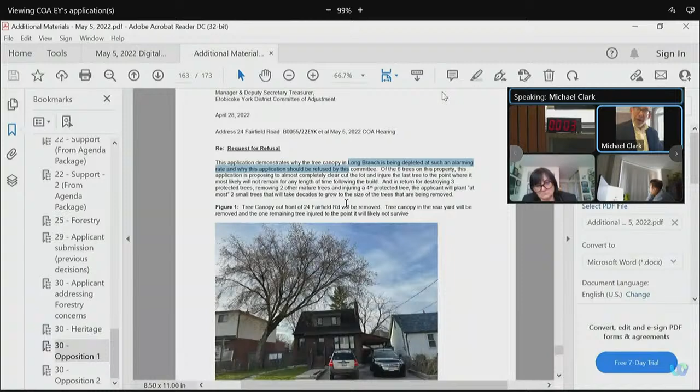Awesome, okay, I just wanted to clarify that. Thanks so much. Go ahead. With respect, do you want anything up? I guess we have your letter up on the board. Yes, thank you.

I'm speaking on behalf of Judy Gibson, chair of the Tree Canopy and Preservation Enhancement Committee for the Long Branch Neighborhood Association. This is a request for refusal. This application demonstrates why the tree canopy in Long Branch is being depleted at such an alarming rate, and why it should be refused by this committee.

Of the 6 trees on the property, this application proposes to almost completely clear-cut the lot and injure the last tree to the point where it most likely will not remain following the build. In return for destroying 3 protected trees, removing 2 other mature trees, and injuring a 4th, the applicant will plant at most 2 small trees that will take decades to grow to the size of those removed.

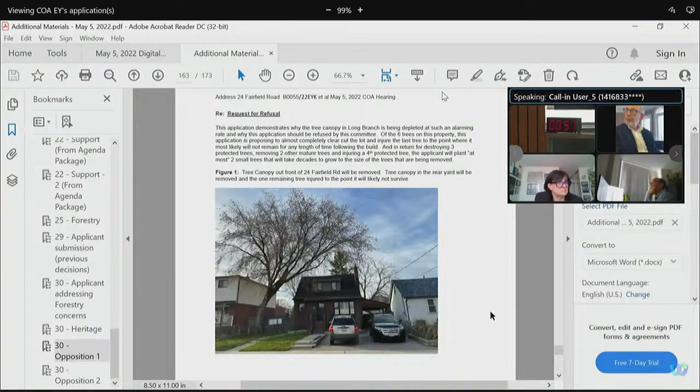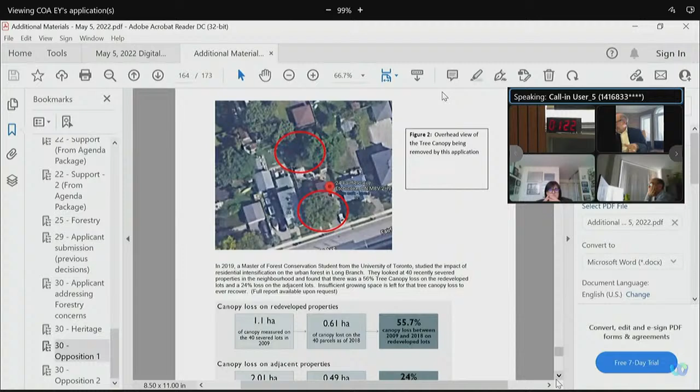In 2019, a Master of Forest Conservation student from U of T studied the impact of residential intensification on the urban forest in Long Branch. They looked at 40 recently severed properties in the neighborhood and found a 56% tree canopy loss on redeveloped lots and a 24% loss on adjacent lots.

Insufficient growing space is left for the tree canopy loss to ever recover. As you can see, these statistics show the 55% and 24% loss of canopy due to development.

This dramatic loss in tree canopy is further confirmed by city data released in 2020. Long Branch is the hardest hit neighborhood for tree canopy loss in all of Etobicoke York, experiencing the greatest tree canopy loss of 43% in all of Ward 3 and all of Etobicoke, according to the 2018 tree canopy study conducted by the city.

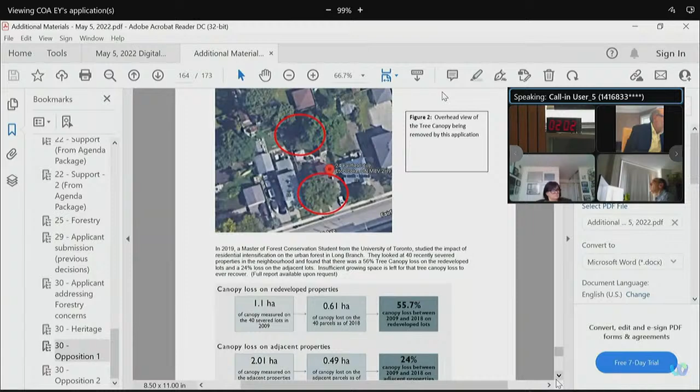Even when one takes into account the standard deviation associated with the above numbers for Long Branch, it is undeniable that our neighborhood is losing tree canopy, which is contrary to the objectives the city has set to grow the tree canopy to 40%.

So the whole city wants to reach 40%. Applications such as this one that destroy mature trees and leave insufficient space for replacement trees are one of the primary reasons for our tree canopy decline. How can 6 mature trees be replaced with 2 saplings that will have to fight to find a place to grow?

This is some relevant planning regulations that are supposed to be followed: protecting our neighborhoods and green space from development pressure, protecting neighborhoods' green space and natural heritage features. Neighborhoods are low-rise, low-density residential areas considered to be physically stable. Development in neighborhoods will be consistent with this objective and will respect and reinforce the existing physical character of buildings, streetscapes, and open space patterns in these areas.

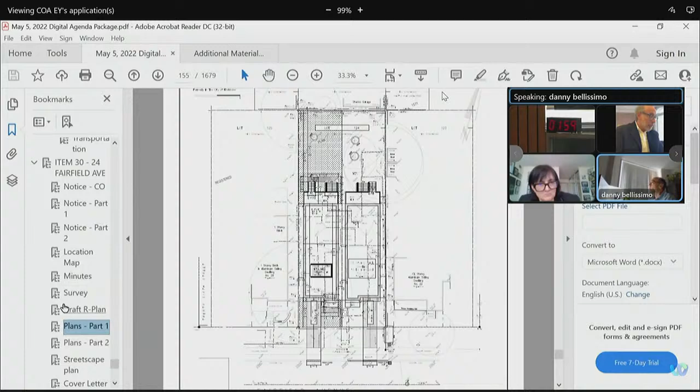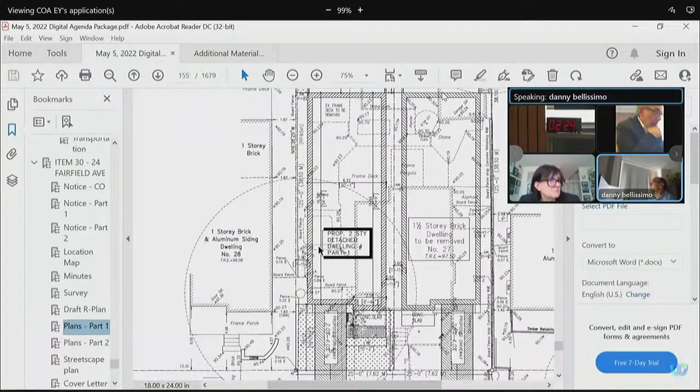The one being removed, if you look at the house to your left, there's one right there on the walkway. And there's one at the back of the house, near the back steps. Correct, because it's right where the walkway is. Yes, I can see that. And which one's at the back? There's one at the back near the steps - that's the one, okay, the left side, got it.

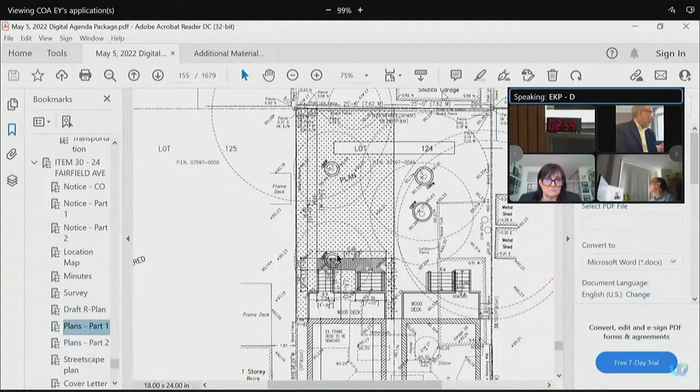And all the others, there's three which are being maintained then - those are the three circles, the calipers. Okay, so at the back, the majority of the big ones are being maintained. So was Mr. Vela correct when he said 6 trees are being removed and 2 saplings put back, or is there less than 6? The others are being protected. Only 2 are being removed. Okay, thank you. Mr. Bellissimo, do you have the answer to your question? Yes, I do, thank you.

Any other follow-up questions, members, or is someone ready for a motion? Just a comment - I've been up and down the street on Street View, and this is not the prevailing character of this particular street. While there are some soldier homes on the street, I'm not really in favor of soldier homes in general. I think there might be 4 of them in total, but it's not the prevailing character of the street. I just wanted to clarify that. And those would be newer ones, new soldier homes? Yeah, they look to be relatively new, but I hope that I didn't approve them. That's all I can say.

Okay, members, awaiting a motion. Please don't put up your hand because I can't see - I only see Ms. Alderson and the clock. I'm ready for a motion here. I think it's another case where the applicant hasn't presented a good enough case to justify the requests being made, versus the Long Branch group, which presented a very good case on why it's inappropriate and not proper development for the area. So I'm going to move for refusal.